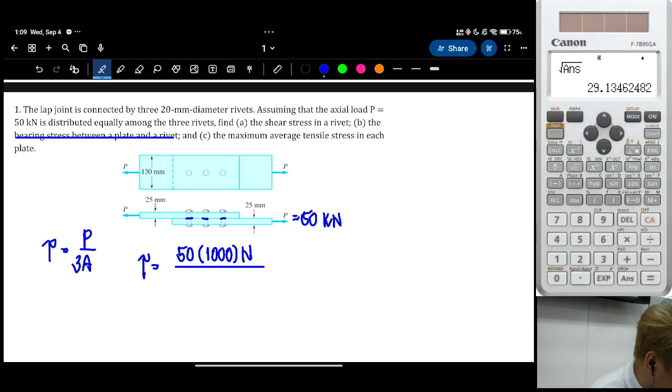So, the area of the circle is pi over 4 d squared. So, that is pi over 4 d. So, the diameter natin na given is 20 squared. So, the shear stress is equal to magkano? That is 50 times 1,000 divided by 3 times pi over 4 times 20 squared. So, that is equal to 53.052 megapascal.

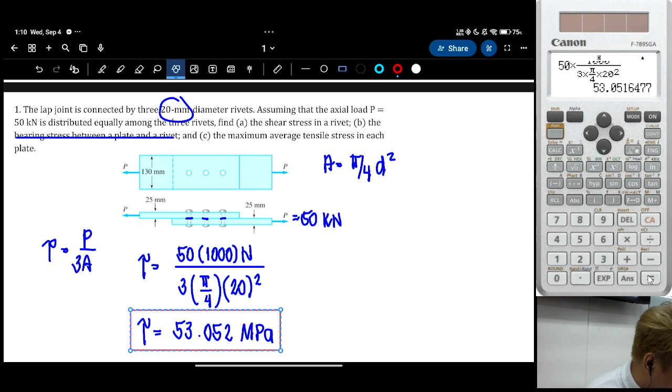Okay. Next question. Determine the maximum average tensile stress in each plate. So, paano to? Pagka average tensile stress. Di ba ang average tensile stress, yung maximum, no? That is the force over the area.